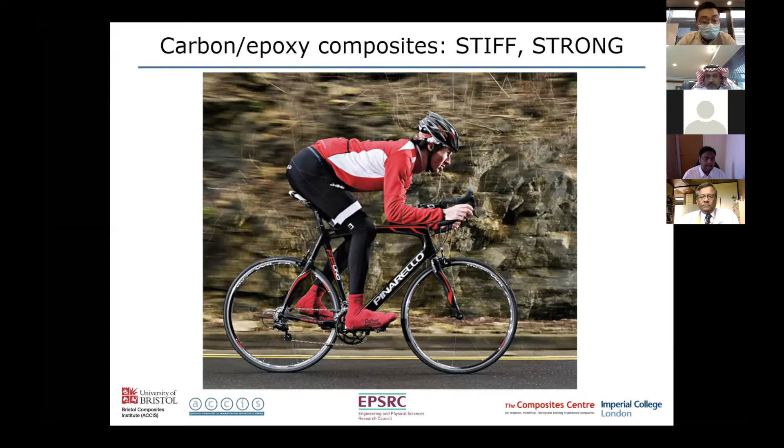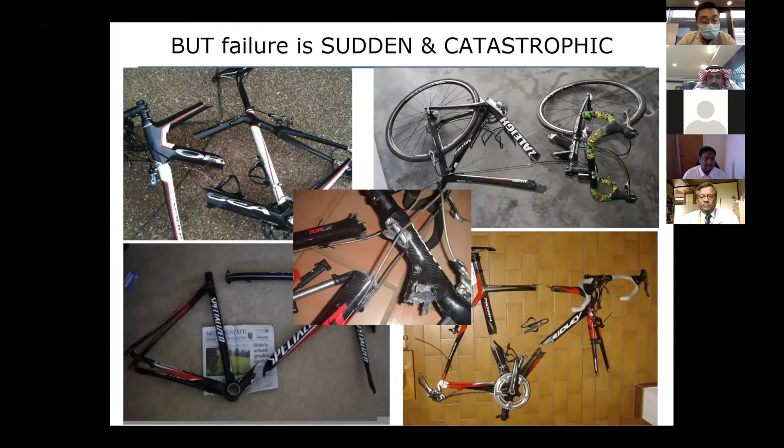Carbon fiber composites are great materials. They're stiff, they're strong, they're light, they're durable, they lack corrosion problems, but they do have a problem: when they do fail, it tends to be a sudden and catastrophic failure, and that's a really undesirable aspect of the composites. So the question arises: can we add metal-like ductility?

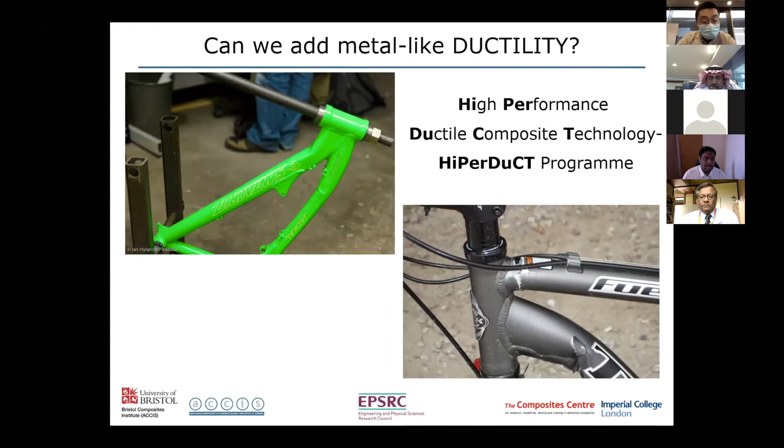So we keep the benefits of the high-performance composites, but actually introduce a more gradual failure. That was the challenge in this program, the HiPerDuCT program, where we wanted to create materials which show the great response of composites, but have some sort of ductile or pseudo-ductile response.

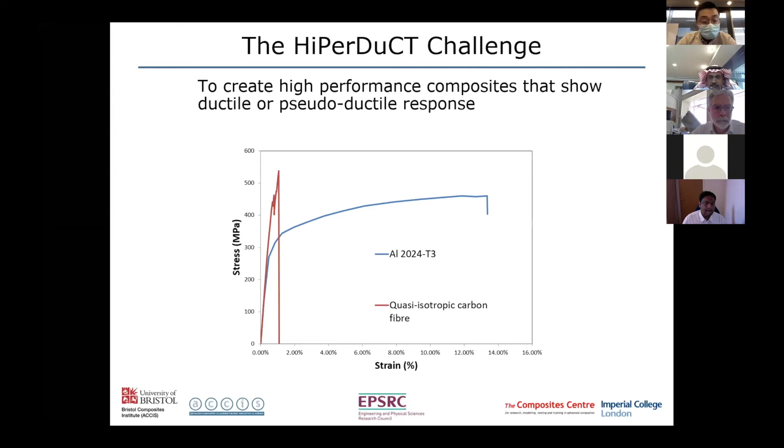We looked at a number of different approaches to this. We looked at whether we can create this additional strain by means of fiber reorientation. We have angle plies, and they can scissor. That produces additional strain over and above the strain in the fibers, giving a nonlinear response and some additional strain and more gradual failure.

We looked at strength dispersion, for example, fragmentation in plies. And we also looked at aligned discontinuous composites, where we can get slip at the interfaces, which can create additional strain. The HiPerDiF program, mentioned yesterday by Enrique, the HiPerDiF method for aligning short fiber composites, came from this program.

We were using it originally, it was developed to create these pseudo-ductile responses and to look at hybrid materials. But we found it was a very effective method for producing materials with just one fiber, and particularly giving the ability to use recycled composites.

The final one was the ductile fibers, work done at Imperial College on creating carbon fibers themselves exhibiting ductile response based on carbon nanotube fibers. That was in the overall program, but today I'm just going to talk about this second theme, where we use hybrid composites to create a pseudo-ductile response.

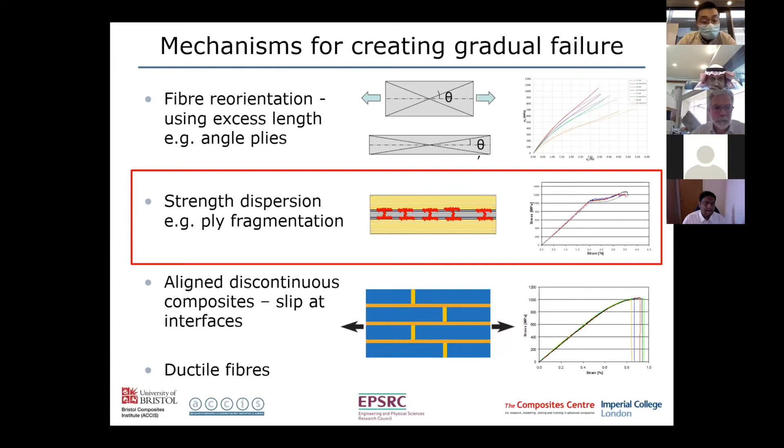I'm going to cover the behavior of these pseudo-ductile thin-ply hybrids in tension, how they behave in fatigue, what happens when we load them in compression, and also in bending.

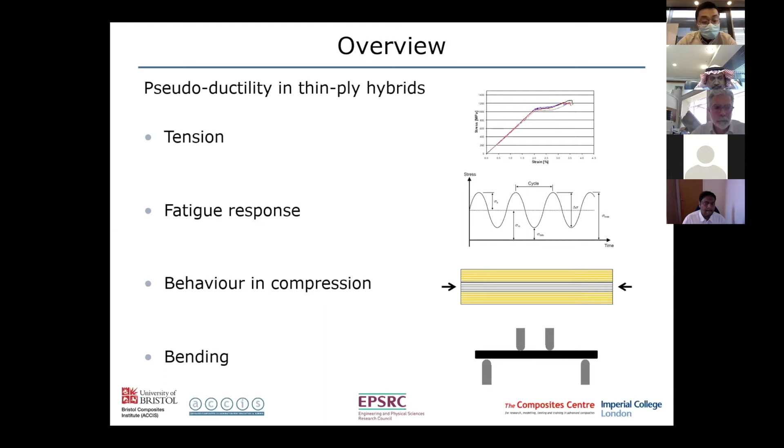Starting with the basic concept of these pseudo-ductile hybrids, we're combining a high strain material such as glass, and a low strain material such as carbon. The glass has a lower modulus but a higher strain to failure, and the carbon a higher modulus but a lower strain to failure.

If we combine those together in an interlayer hybrid, and do it right, we can produce a material which shows this sort of stress-strain response, much more similar to a yielding metal than what was typically seen with a high-performance composite.

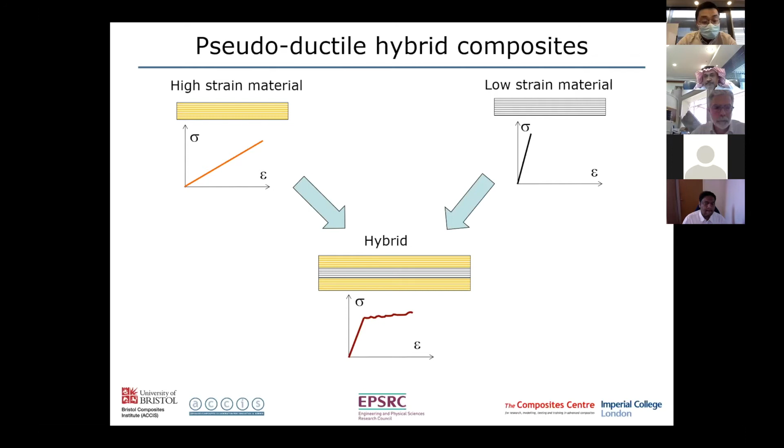So how do we do this? Well, we have to consider the different damage modes that we get in these hybrids, and we have to design them the right way to get this behavior.

If we start off with too much carbon, then what happens is when the carbon breaks, the glass will break as well, and we get a catastrophic failure. If we put a bit less carbon in there, when the carbon fails, we get a delamination at the interface, but again we get a sudden load drop, which is not what we want.

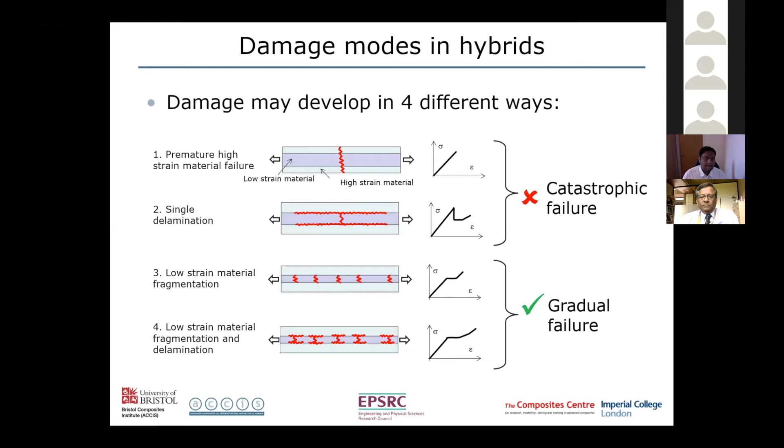But if we also make that carbon layer thin, there won't be sufficient energy to propagate the delamination when the carbon breaks, so we get multiple fragmentation, shown schematically here, which gives a plateau on the stress-strain curve. This can be combined with a bit of localized delamination around the breaks, giving us the gradual failure we want, without catastrophic delamination or fibre failure.

So what does this depend on? We developed these damage mode maps, which show how different combinations of materials create the pseudo-ductility and the right failure mode that we want.

It really depends on two parameters. Here I'm showing this for an S-glass and high-strength carbon combination, but we can produce these maps for any material combination. On the bottom axis we've got the carbon-glass proportion, and the second axis is the absolute thickness of the carbon layer.

If we have too much carbon, we get premature failure, the whole thing fails catastrophically. If we have less carbon, but it's thick, then we can get catastrophic delamination. Neither of these are what we want.

But if we have sufficiently thin absolute ply thickness and not too much carbon, then we can get fragmentation and delamination, or just fragmentation on its own. This gives us the pseudo-ductile, gradual response which we want.

The colors represent the amount of pseudo-ductile strain. If we're in this region, close to this transition, we can get 1 to 2% of pseudo-ductile strain, additional strain over and above the strain in the carbon. Of course, we don't want to be too close to this, otherwise we risk going over into the catastrophic failure modes. So we want to be in this region, not too close.

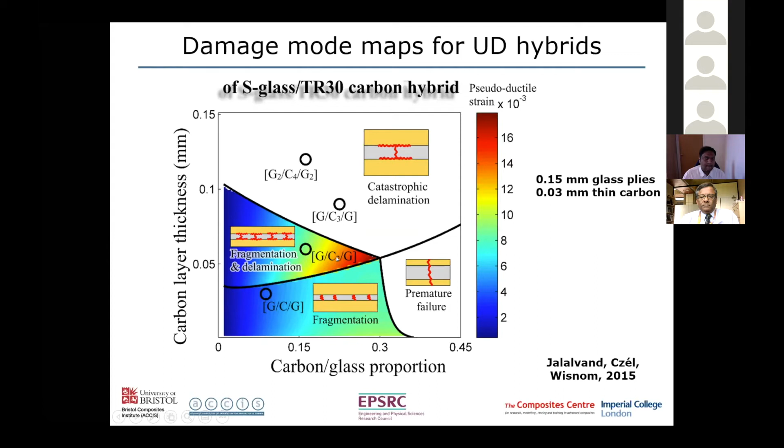Showing the results for that combination of S-glass and thin, high-strength carbon: here we've used two layers of 0.03 millimeter carbon, so 0.06 millimeters of carbon sandwiched between standard thickness S-glass. You can see we have this very nice plateau on the stress-strain curve, and in this case we get about 1.2% additional pseudo-ductile strain beyond the point at which the carbon fibers start to fail.

Another interesting aspect of this is the pattern we see on the surface. The laminate is initially black due to the carbon, but when it fragments and we get delamination, these patches appear because light doesn't get past the interface between the glass and the carbon. This is a very nice way of visually demonstrating that we've exceeded the pseudo-ductile yield point, and is very promising as a way of indicating an overload.

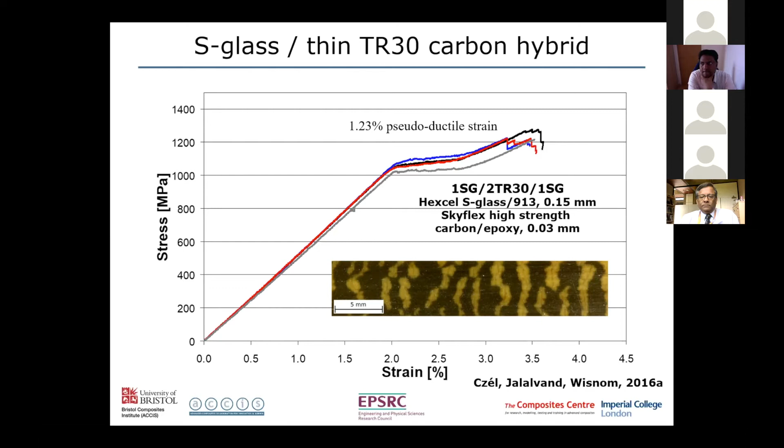So as well as producing these nice pseudo-ductile stress-strain curves, we have an indication that the material has been overloaded. This can be used as a damage sensor, either as part of the surface of the structure or as a separate bonded-on sensor, which could be used with metal structures as well as composites.

We can also do the same thing with all-carbon hybrids. Rather than using carbon and glass, here we've used two different grades of carbon: an XN80 high modulus carbon and a T1000 intermediate modulus, in both cases thin plies. Again we see this pseudo-ductile response with a plateau and about 1% of additional pseudo-ductile strain.

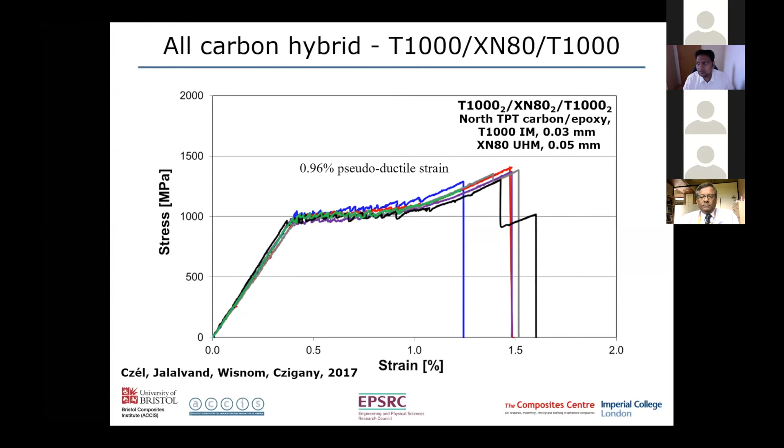We can make these into quasi-isotropic laminates, and there are two ways we can make a hybrid. We can do it by dispersing the material. So in this case here, we've got a hybrid sublaminate of 45 glass, 45 carbon, and 45 glass, and that hybrid sublaminate is repeated with different orientations through the thickness.

So that's a material dispersed laminate, or we can do it this way, where we disperse the orientations but keep the materials together - so we have a quasi-isotropic glass, then a quasi-isotropic carbon, then a quasi-isotropic glass. Both methods work and have different advantages and disadvantages, but generally we think the orientation dispersed one is better, because it produces less edge delamination, which can be another critical failure mode in composite structures.

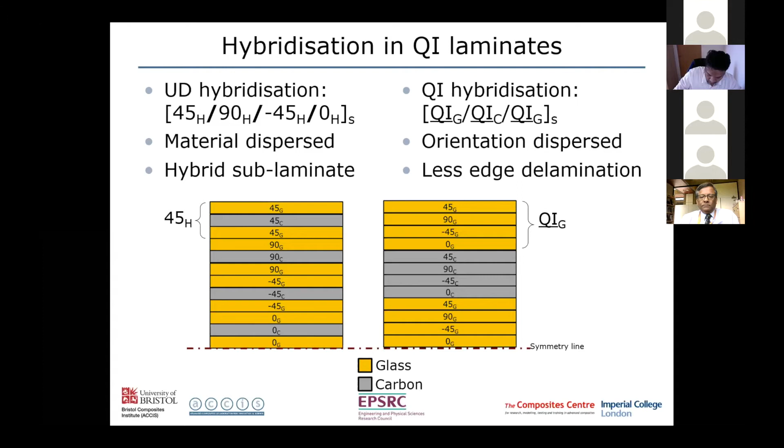So you see with this quasi-isotropic laminate, this time it's a 0 ± 60 layup, we see the same pseudo-ductile response with a bit of a plateau, additional strain, and we can load this in any of the fibre directions and get a similar response in each of the directions.

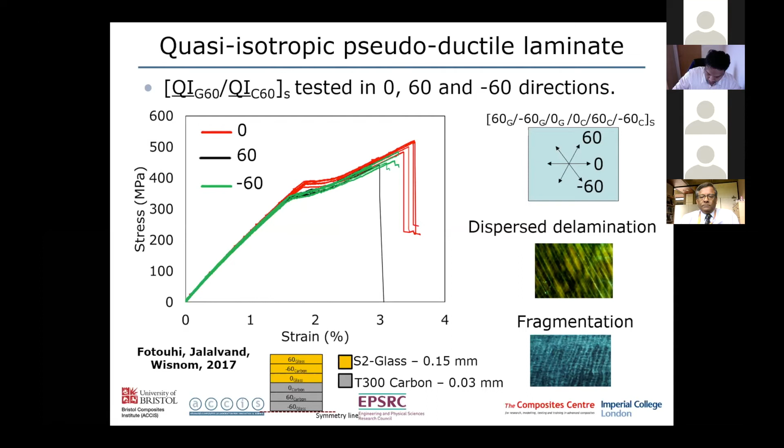One of the key features this produces is notch insensitivity, because we can suppress the stress concentrations. If you have a hole or a crack, the stresses are very high next to that hole or crack, but this pseudo-ductile response redistributes load in the same way as yielding would in a metal structure.

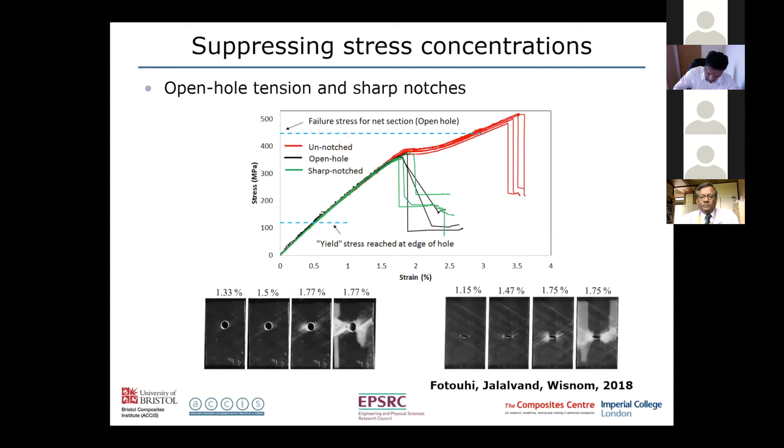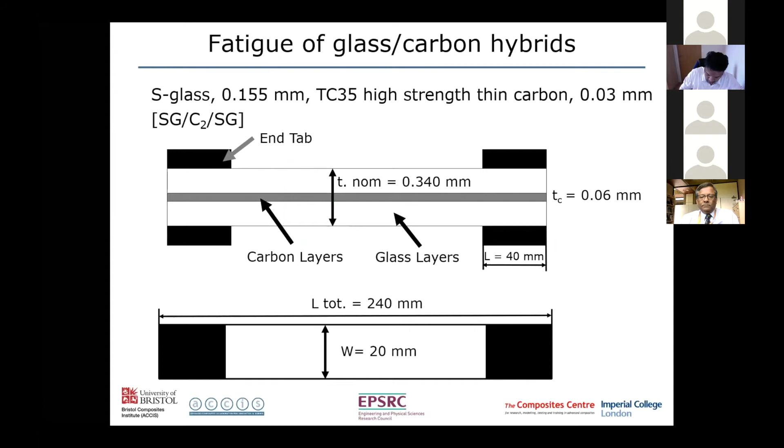We've also done work looking at the fatigue performance, which is actually pretty good. In this case here, it's another different fibre, but a similar high strength thin carbon sandwiched between glass. So the first thing is we established the baseline knee point.

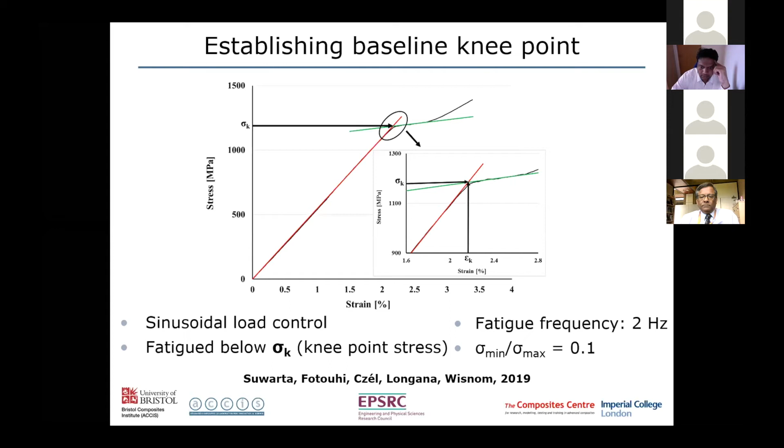So we have this nonlinear stress strain response. We establish that knee point, and then we can fatigue it at a level below that knee point and see how it performs. Those fatigue tests were done in sinusoidal load control at 2 Hertz with an R ratio of minimum to maximum stress of 0.1.

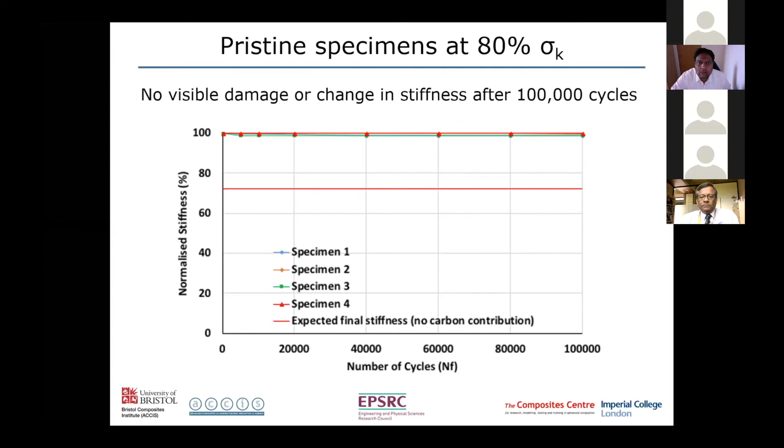And you can see that at 80% of that knee stress, there's no visible damage or noticeable change in stiffness even after 100,000 cycles. So if you keep the stress below that pseudo yield point, then they're very good in fatigue. You take the stress a bit higher, then after some time you do start to get some failure.

So at 30,000 cycles, at 90% of that knee point, then you do start to see some failure, because at 90% of the knee point, there's already a little bit of damage in that carbon, and it does eventually start to spread.

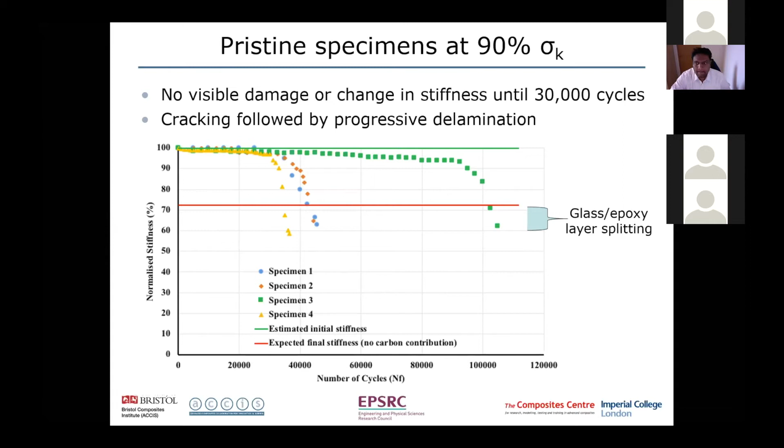We've also looked at the point of actually loading it beyond this pseudo yield point. So initially we preload it up to this point. We go beyond that yield point, introducing damage - so we've already got these fragmentation events occurred, we've got fragmentations in the specimen.

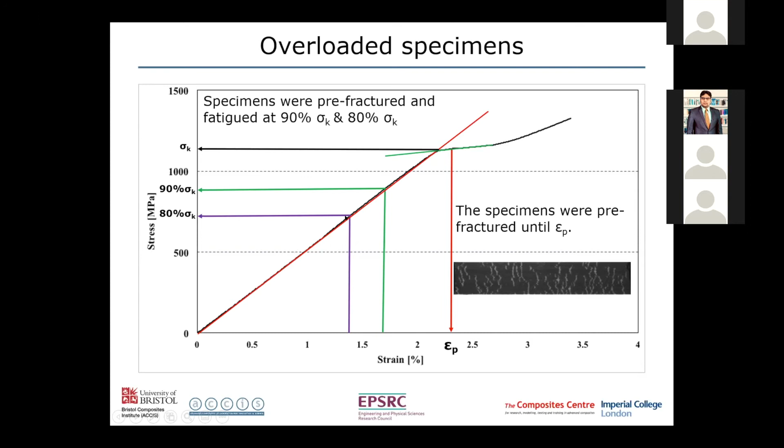And then after we've put that damage in, we fatigue it at some proportion of that knee point stress and see what happens. So at 80% of the knee point stress, you see that the damage does spread after a few thousand cycles, then we start to get propagation, and eventually the whole specimen delaminates, but it's still able to carry load because the glass is intact.

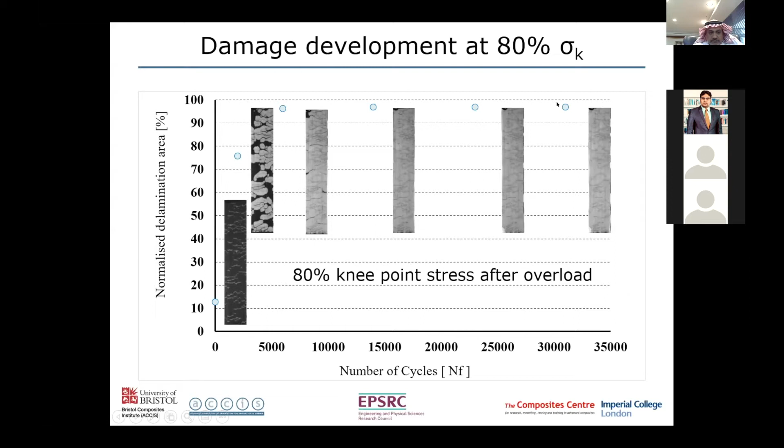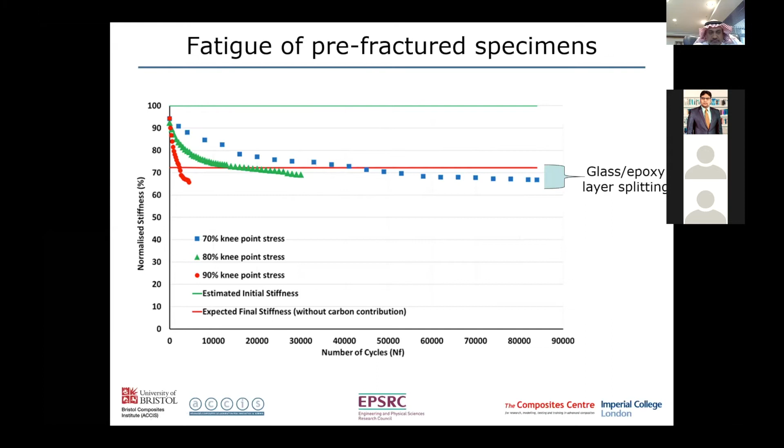And if you look at the different levels here, plotting 70, 80 or 90% of the knee point stress, you can see that at 90% it delaminates after a few thousand cycles, but at 70% it goes for a few tens of thousands of cycles before it delaminates. So overall, this fatigue performance looks quite good.

What about compression? When we started this project, we were looking primarily at the tensile performance, and we were not expecting this mechanism really to work in compression. So the question that arose was: can you get fragmentation under compression as well as in tension? Initially, we looked at this by doing a bending test, just putting one layer of this hybrid material on the surface here, on the compression surface.

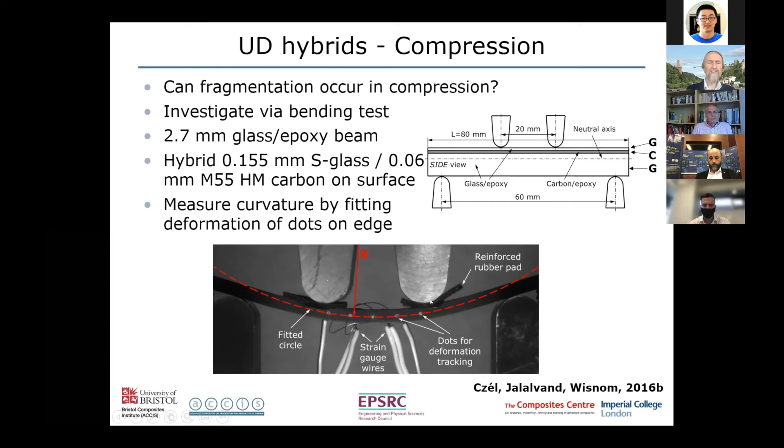In this case, we're using S-glass with a thin M55 high modulus carbon on the surface. We loaded it up and measured the strain based on fitting points on the edge of the specimen and working out the curvature from that. And what we see is a distinct change in slope at 0.5% strain, which is the compressive failure strain of this M55 fibre.

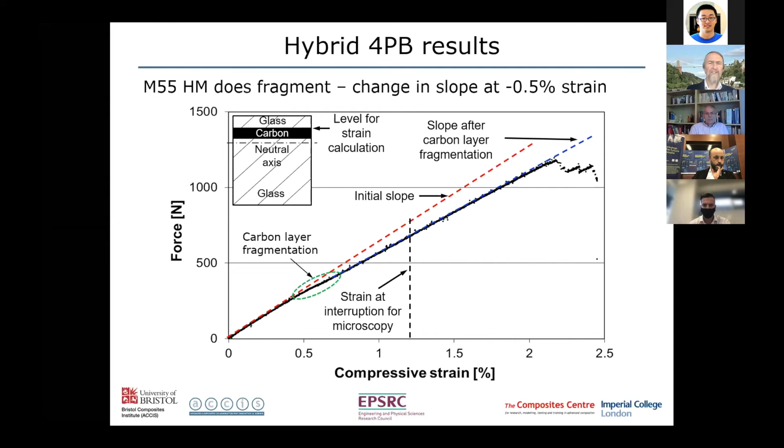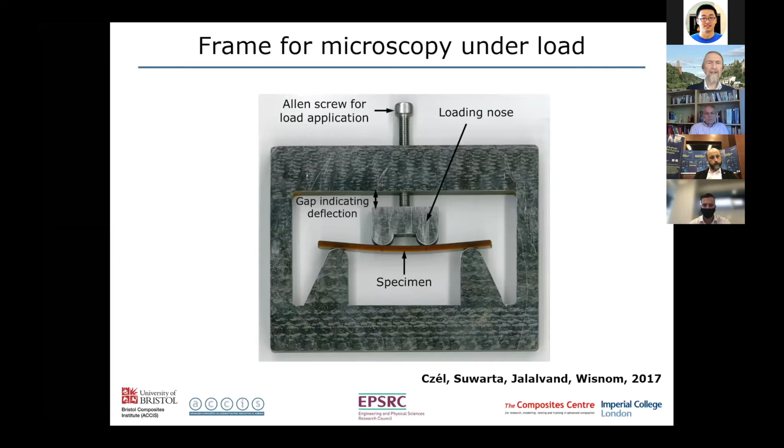It's linear beyond that. So to understand what was happening, we did some interrupted tests where we took them to 1.2% strain, well beyond this knee point, to look at what the damage was in the specimens. We had a little jig so we could actually load it and unload it under the microscope to look at the development of damage.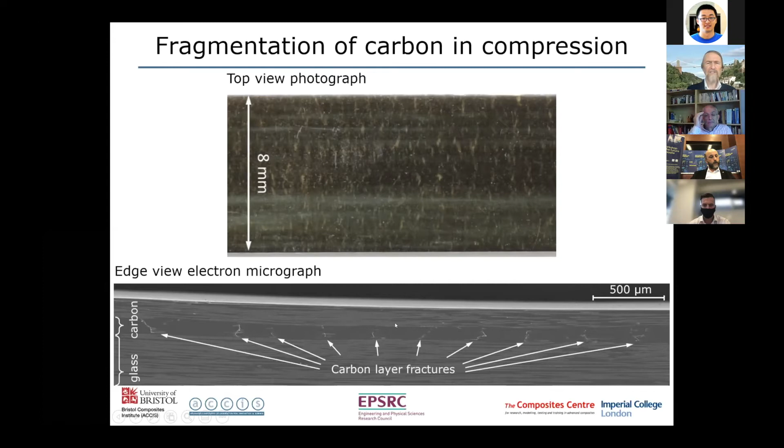Now if you look at those, you can consider this a little bit like a fragmentation test. In tension, you have a critical length of a fibre, or this can be applied at the ply level. And if you work out the length required to get load into the ply by shear, you can work out this critical length, which is a function of the modulus, the compressive strain to failure, the thickness of the ply, and the interfacial shear stress.

So if you put the numbers into that equation, you work out that the critical length should be about 1 millimetre. But actually, these fragments have a much closer spacing, with an average of about 0.4 to 0.5, and a distribution of those. So the fragments are much shorter than the critical length.

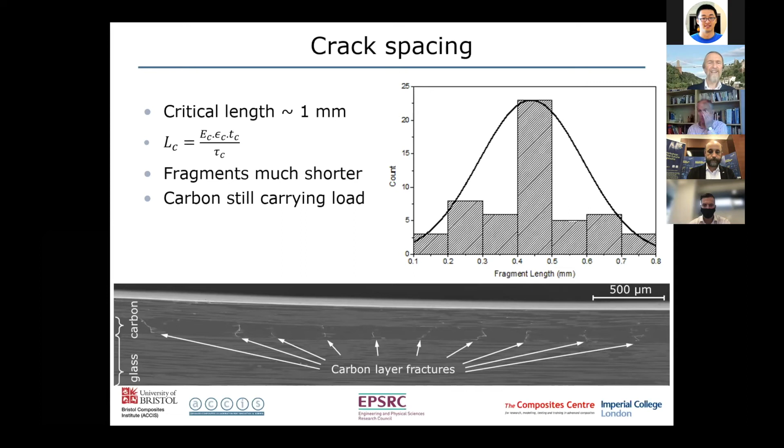And what that tells us is that the plies are still carrying load after they fragment. I guess that's not surprising because they're in contact. But then the question is, how do we get this additional strain if they're in contact and still carrying load? Why do we get additional strain?

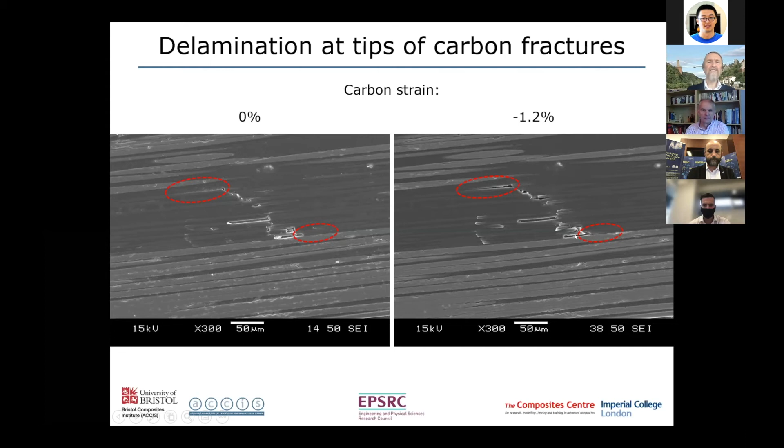So to look at that, let's look at this magnified version of what happens at the crack tip. Here you've got an angled crack, unloaded, and if you look at the interface, you can just about see there's a delamination starting, but it's closed. But if we put the strain on at 1.2%, you can see that delamination has opened up, and the same down here. So what's happening is we're getting a wedging action, which is causing that delamination to open up.

And if you look at higher magnification, you can see that unloaded, those fibres line up approximately. But when you put them under load, you can see that they displace this way, but because of the angle, there's also a displacement in this fibre direction. So that produces a bit of additional strain. That's what gives us this pseudo-ductile strain that we get in compression.

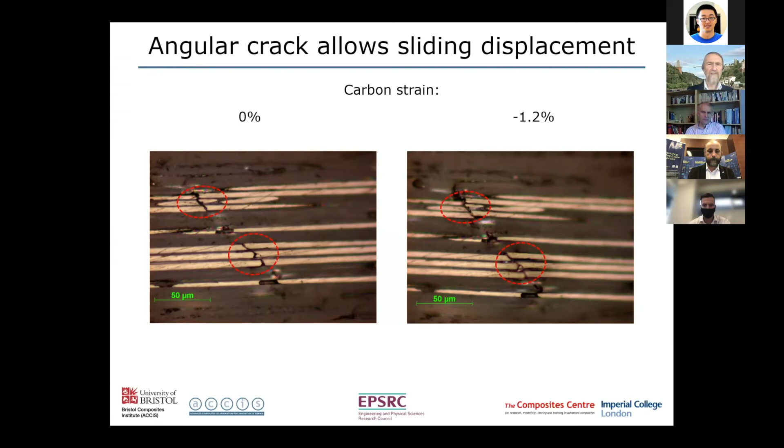So showing that schematically, we have the crack, which is typically at some sort of angle, and it's not a nice smooth crack like that, but conceptually we have a crack and some sort of behaviour where it can slide, albeit with friction and resistance, and then here we have a potential delamination opening up.

But provided we keep this ply relatively thin, there will not initially be enough energy to make that crack propagate. So this will be stable. But at a certain point, and especially depending on the ply thickness, this may propagate, and then we would get an unstable failure.

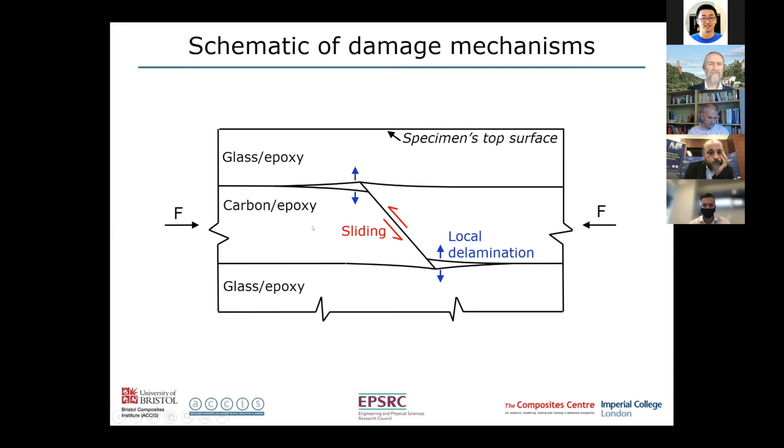So to look at this, we did tests in direct compression using the same M55 carbon and S-glass materials. In this case, we've got a layup where we've interspersed the carbon between the glass all the way through the thickness of the specimen. And we've varied the number of carbon plies, having either single, double, or triple carbon of thin 0.03 millimeter ply between the S-glass plies.

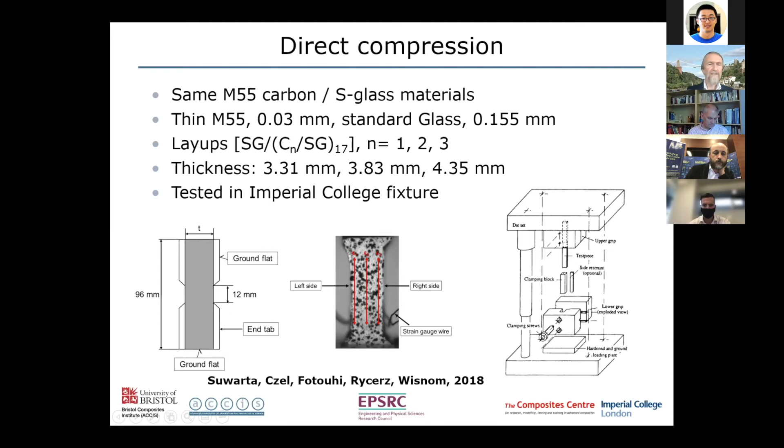And then we've tested them in the Imperial College rig and looked at how they behave, measuring the strain with both a strain gauge and an extensometer. So this is the response. You can see that we do get a nonlinear response with a change in slope at about 0.5% strain, which is the compressive failure strain of these carbon fibers.

With the triple ply, you see that as soon as that fragmentation starts, the whole specimen fails. But when we have two or one ply together, then we get a change in slope. It still increases, but then at a certain point it fails due to the delamination, but at a much higher strain.

So this behavior is similar to what we saw in tension, but in tension we saw a plateau, whereas in compression we still see a secondary slope. That's because the carbon is still carrying load and can continue to contribute much more than it can in tension, where we have these fragmentations and unloading of the carbon plies.

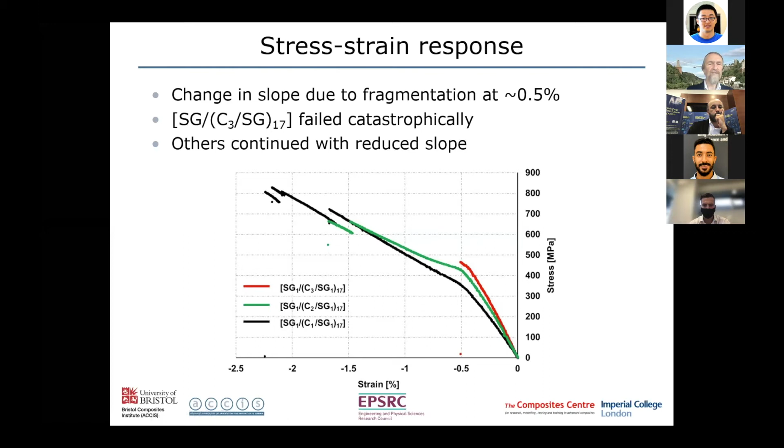Looking at the specimen, we have fragmentation occurring at this point. We go quite a lot further, and at this point where there's a load drop, one of the surface plies has delaminated. Go a bit further, and the one on the other side delaminates, and shortly after that the whole specimen collapses and we get complete failure. That's what happens with a single ply of carbon, and we get similar behavior with the double ply, except it fails a little bit earlier.

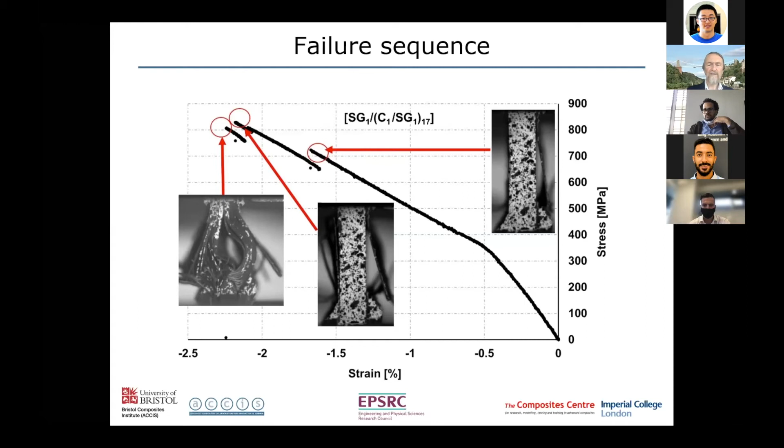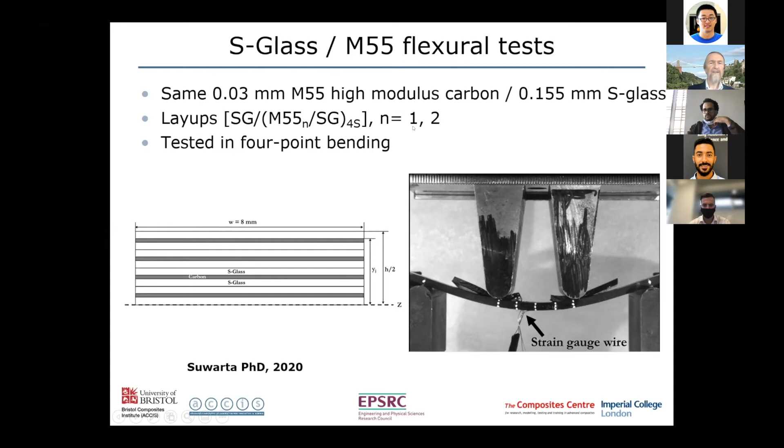Moving on to look at the flexural behavior. Here we're taking the same 0.03 millimeter M55 high modulus carbon and the standard thickness S-glass plies, but now laying them up right through the thickness and testing them in 4-point bending. Again, we've changed the number of these M55 plies to be either a single ply or a double ply.

What you see here is that first we see fragmentation in compression at about 0.5% strain, the compressive failure strain of the fibers, and you can just about see a bit of a change in slope. It's not very dramatic, but we do get fragmentation in compression starting here. Then later, at a slightly higher strain of about 0.8%, we get fragmentation in tension. This is much more visible, and we get similar behavior whether we have a single or a double ply of carbon.

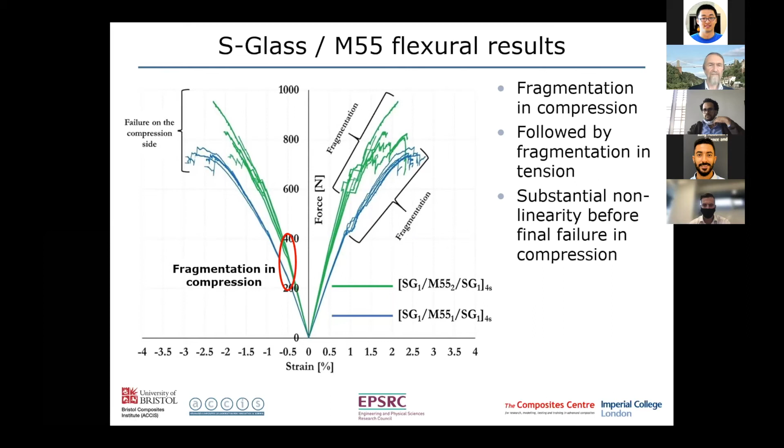We get substantial nonlinearity before the final failure occurs in compression. If you look at the specimen afterwards, on the compression side we have these characteristic angled cracks which look like shear cracks going through the ply. On the tension side we get quite a different type of response, because there we have tensile fiber breaks that don't all line up. Different fibers break in slightly different places, but they're still relatively close together and can interact to form some sort of staggered crack.

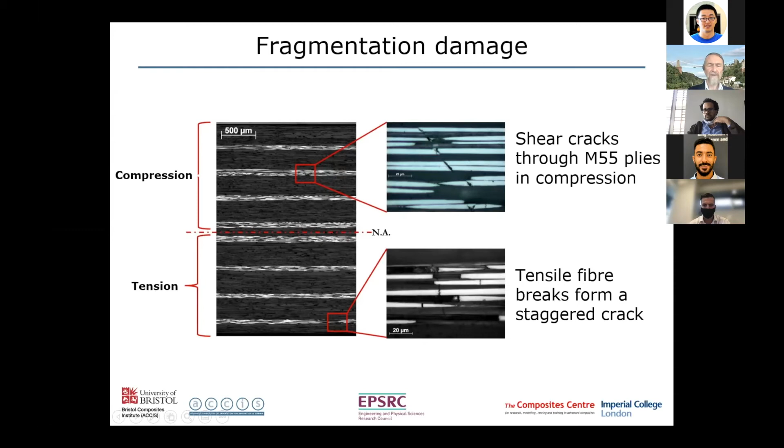So then we change the fiber: instead of an M55 high modulus fiber, which has a relatively low strain to failure, we put a TC35 high strength carbon epoxy instead. The setup is the same S-glass standard ply thickness with one or two of these high strength carbon thin plies sandwiched between them and loaded in 4-point bending.

Again, we see high nonlinearity, but this time we only get fragmentation in tension. Because of the much higher failure strain of this TC35 carbon fibre, we don't see any fragmentation in compression. We get fragmentation on the tension side, which gives a substantial change in the slope, and we get quite high strains, with final failure by compression.

But look at the strains here: 3% strain is a very, very high failure strain for a carbon fibre material. That's 2 or 3 times what you typically expect for this sort of material in normal direct compression.

And that's for several reasons. One reason is because it's a bending specimen, and in a bending specimen the strain gradient through the thickness can increase the failure strain. But also we think there's a hybrid effect, in that the carbon fibres are supported by the adjacent glass, and therefore this inhibits the shear instability, microbuckling type of failure which you typically get with carbon fibre.

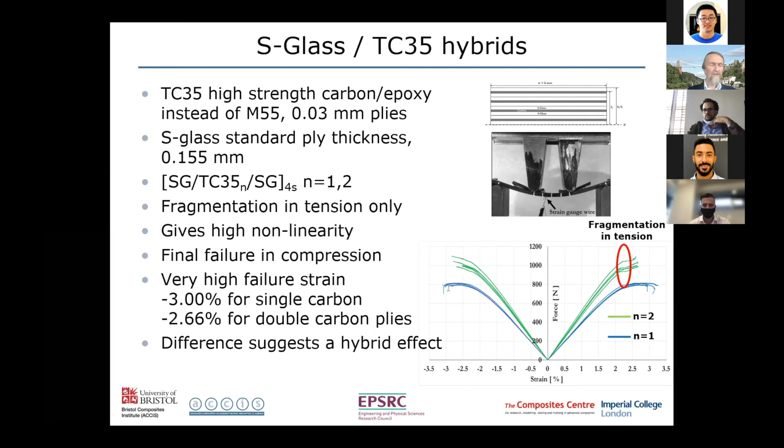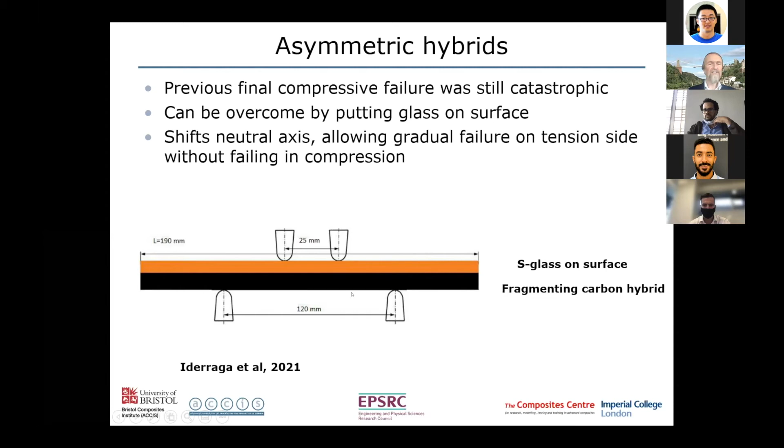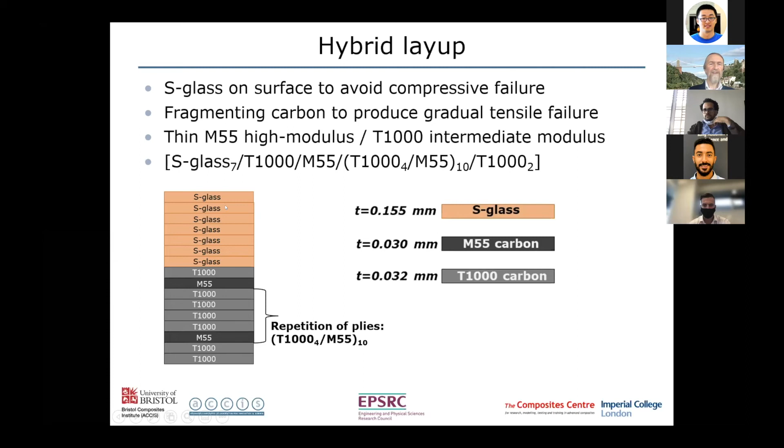So initially we did this with unidirectional material. We use the same S-glass material as before, but now we've got a carbon hybrid, and essentially it's layers of M55 high modulus fibre sandwiched between pairs of T1000 intermediate modulus, which have a higher tensile strain to failure. And the layups here, we have a number of 10 repeating blocks of M55 between the T1000 and 7 layers of full thickness glass.

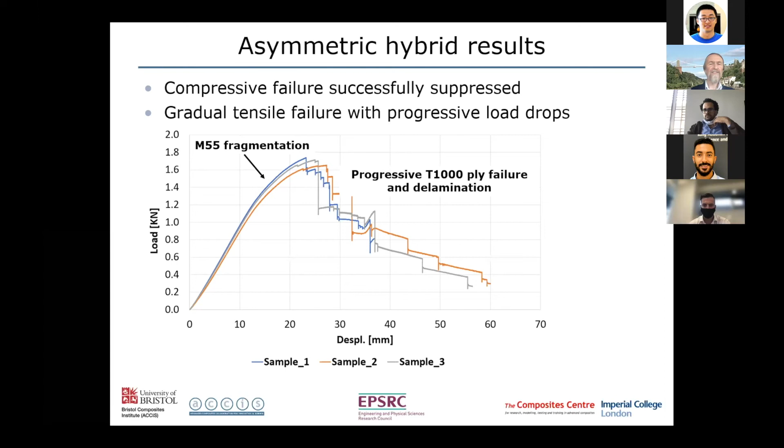And then we can go a bit further and the next ply fails and that delaminates. And then progressively we can continue loading, and what happens is it progressively fails through the thickness on the tension side, but still remains intact. And even at the end of the test, the specimen is still in one piece. So we get very large deformation. The specimen is still intact.

At the final point, it just slips between the rollers and we can't apply any more displacement to it or any more load. And when we take it out of the test rig, you can see that it's now basically flat, but you've got these spears of the carbon fibers from these parts here, which have failed progressively through the thickness, but the rest of the specimen is still intact, and it can still carry an appreciable load despite the gross amount of damage which has been induced. So this is exactly the sort of behavior that we wanted.

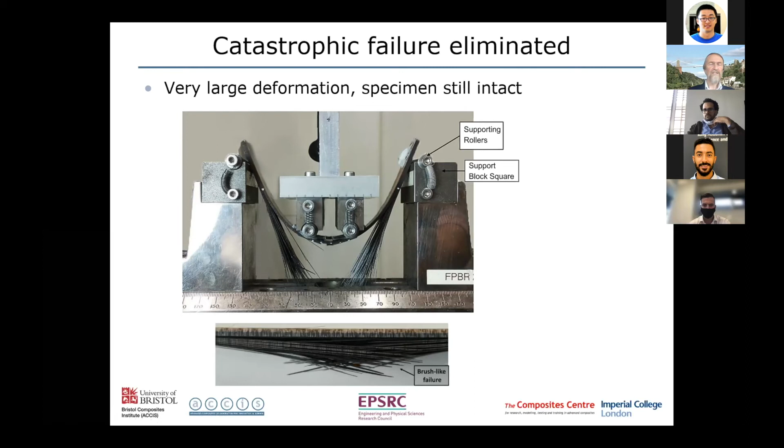So then we can do the same thing with a quasi-isotropic instead of a UD layup, and these specimens have a similar ratio of glass to carbon, and the carbon sublaminates are similar, not exactly the same as the ones in the previous picture I showed. In this case here, we just have a single M55 sandwiched between 2 T1000, and this laminate is repeated through the thickness. So we have a 0 plus minus 60, 0 S-glass, and then we have a 60-degree ply with T1000, M55, T1000, then a -60, and then a 0, and that's repeated 6 times through the layup.

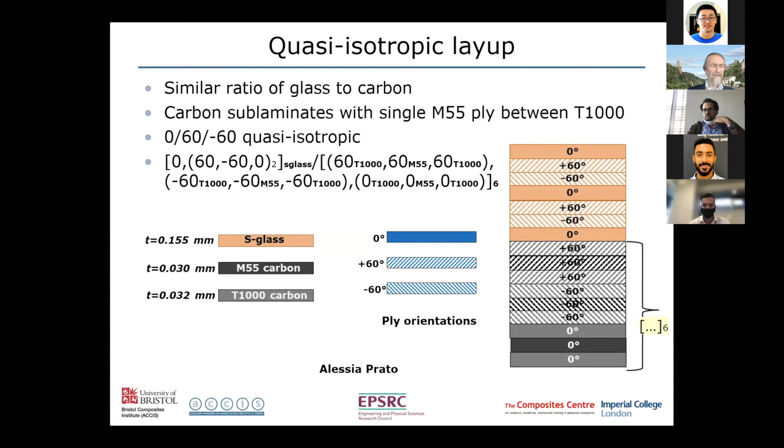And with these, we see a similar overall response, these quasi-isotropics compared to the UD. Similar mechanism. Again, we get this non-linearity occurring here, and then we get progressive load drops, and the specimen is intact at the end of the test, and potentially can give us a very high energy absorption.

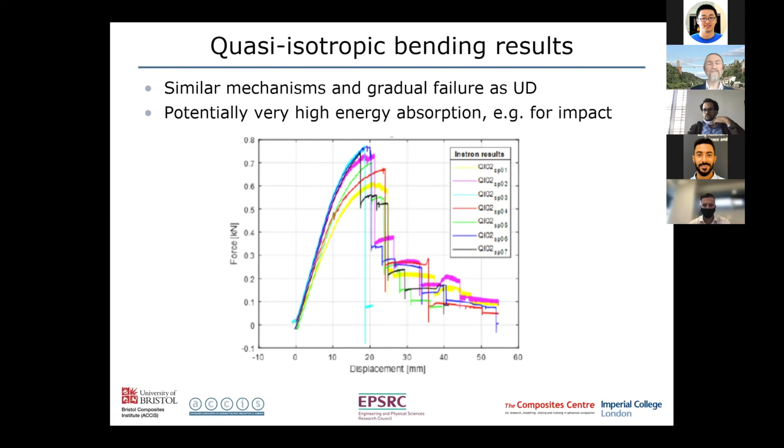So what are the benefits of this ductile or pseudo-ductile behavior? By putting this sort of behavior into the material, we get a warning of overload or impending failure. We get non-catastrophic damage, and we also have a detectable stiffness change. This gives the ability to carry load after this so-called failure initiation point until the structure can be repaired or replaced. We can also potentially exploit a greater proportion of the fiber's ultimate strain.

So design strains are typically quite low because people are worried about damage and about catastrophic failure. To avoid these sorts of problems, design strains are very low, well below what the composite will take. Our plan with this is that you can actually use a bit more, because so long as you keep below that pseudo-ductile limit, the specimen remains intact, is not damaged, and this has many benefits. For example, with the load redistribution around the stress concentrations, it provides notch insensitivity. This should also make the materials less sensitive to defects and enable a large amount of energy to be absorbed.

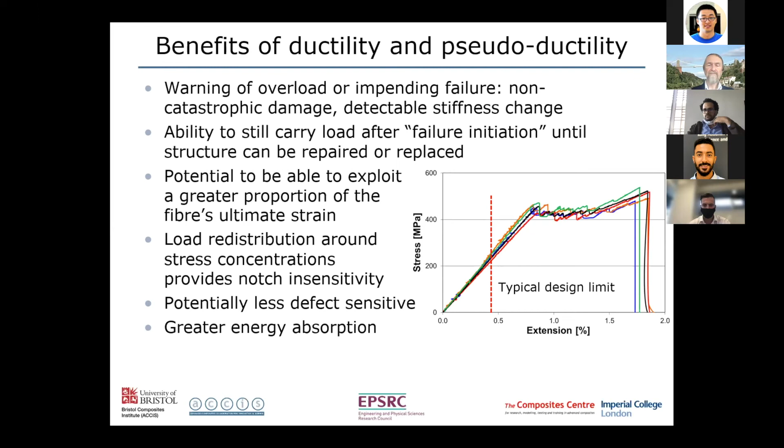So in conclusion, I've shown that the ply fragmentation creates a pseudo-ductile response and gives us notch insensitivity in tension. We have very good fatigue performance, no damage if we keep at 80% even after 100,000 cycles. And if we do statically overload those specimens, they will slowly delaminate, but only over quite a large number, a few thousand cycles.

We found that the fragmentation and non-linearity can also occur in compression, depending on the fibre, but certainly for the M55 high modulus fibre, we can get a fragmentation and non-linear response. The challenge is when you have a bending application, you have both tension and compression, so it starts to get quite complex, and the compressive and tensile failure strains are different. So you need some careful design to get the sort of response you want. We've demonstrated we can get a nice gradual failure also in bending, and that if we put a surface glass layer, we can eliminate the compressive failure and give a very high nonlinear large deformation response with high energy absorption.

So in summary, we've shown good performance in tension, compression and bending, and I believe that these fragmenting hybrids are very promising as a potential different way to take advantage of the good properties of composite materials whilst avoiding catastrophic failure, providing some warning and an increased margin of safety.

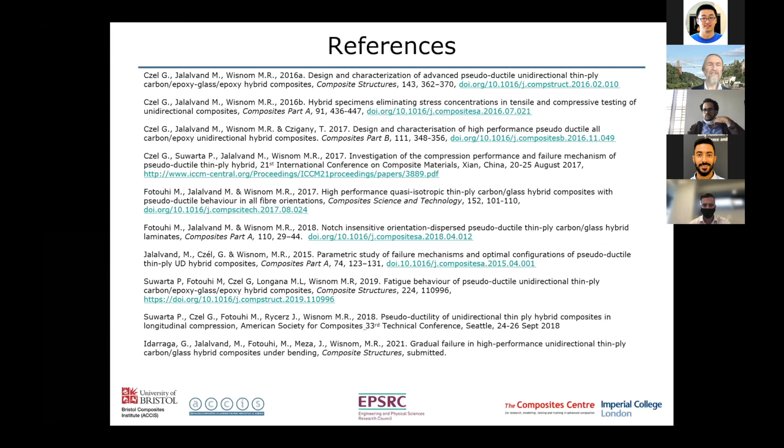So there are some references, a lot of papers have been published on this, and these will be available. Thank you very much for your attention. I'm very happy to take questions.